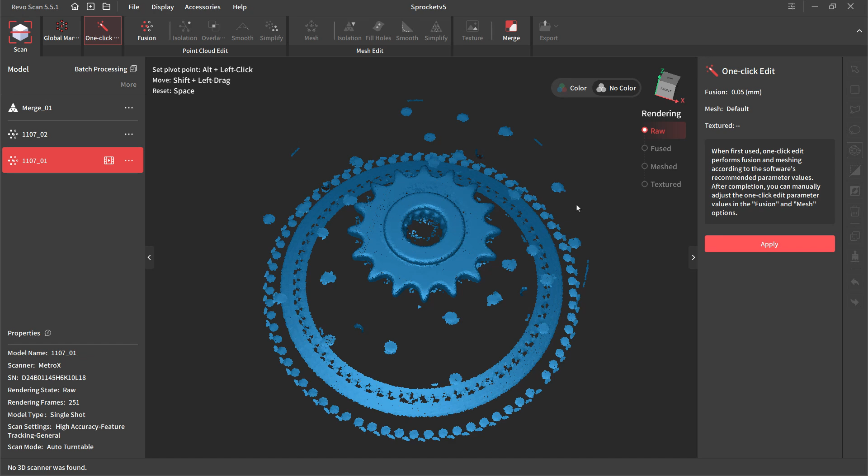So in most of the videos we've done, we've kind of left everything a bit raw, and then we've dealt with it in Fusion or some other CAD program. But I think it's important that we at least understand what some of these tools do and make sure that we can figure out how they apply to our models.

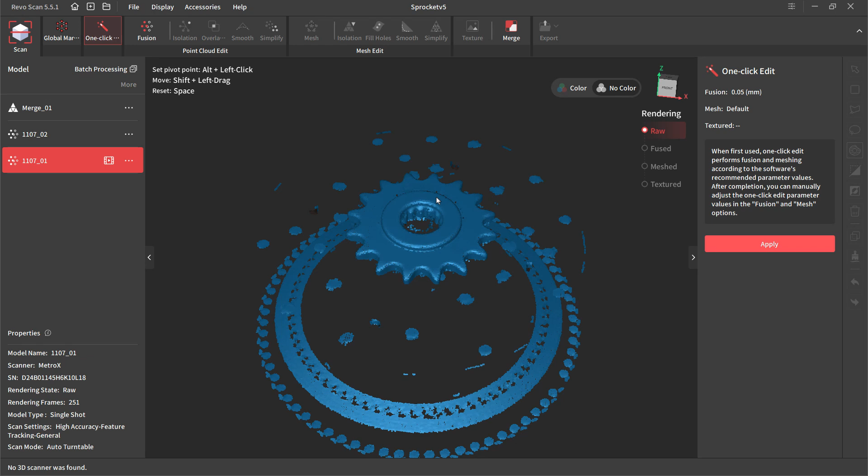So this video, we're looking at a sprocket that was scanned using the MetroX, and it was done on a turntable, which means that it's using single shot mode. So the first thing that we want to identify is that the raw data from single shot mode, whether it's on a turntable or whether it's handheld, will have these little camera icons that are going to show us each view that was captured by the scanner.

Now, whether or not it's single shot mode or if it's laser or if it's just traditional handheld scanning, you have the ability to do keyframe edits, which allows you to go in and delete and remove individual frames from everything that was captured. Now, with this specific one, we captured 251 frames. Now, that's a lot of data for the sprocket, probably more than's needed, but something that you should really keep in mind is that if you start deleting keyframe data, it's permanent.

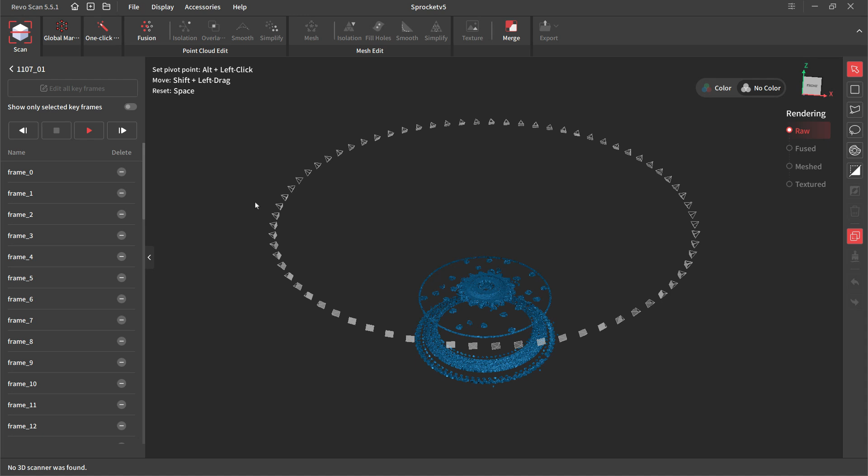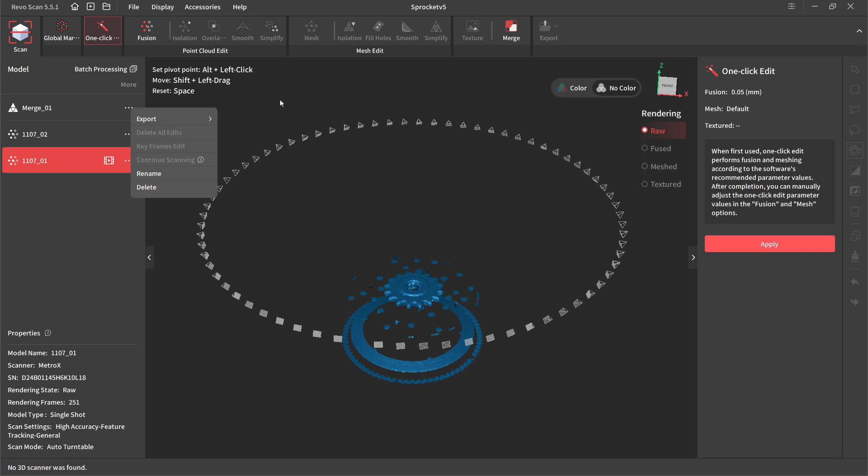Unlike making edits to point clouds or making edits to the mesh, you can't back up and undo removing keyframes. That raw data is going to be removed from your project. I'm not sure if that data is saved anywhere in a cache or in your project outside of the scan, but it's not going to be able to be undone like you can do by going up and undoing those edits that you've had. So keep that in mind. You can remove it, but there is a potential problem of loss of data.

So whenever you go through the process of scanning something, you always have this one-click option, but generally I go through the Fusion process, manually modifying the point clouds and then doing the mesh edits because I like to have control over what each step is doing. So the first step is always going to be fusing the points together.

Now, a recent update of Revo Scan has allowed us to reduce the point distance down to 0.05. That's only available on certain scan types for the MetroX, so the full field and turntable, which uses the full field mode. And if you're using something like the Mini 2, you'll be able to now do this down to 0.05. If you're using one of the laser scan modes, or if you have, let's say, a Pop 3 or some other scanner, then those numbers are going to be reduced from what they have been, but it's not going to go down this low.

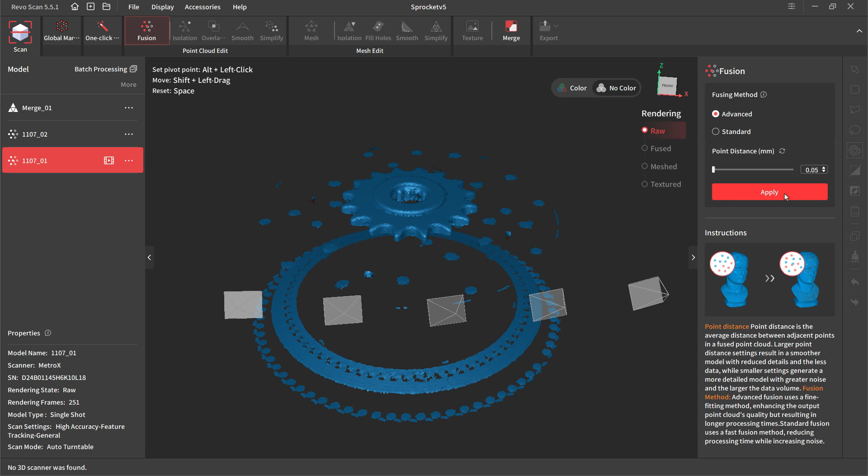So we're going to apply it using the advanced method. The advanced method will give us a more accurate final set of points. The standard will be a little bit quicker, but there may be more noise in the data. And when we talk about noise, really what we mean is vertical variations in the point location. So you can think of it as like an orange peel or a texture that would be on an otherwise smooth, flat surface.

Part of this is going to come from however you prep the part, whether it's scan spray, like in this case, or if it's a shiny part, the actual reflections or the intensity of that shine can have an impact on where those points are. So even though something looks very high polished and very well machined, because of its texture and maybe some settings like the exposure, you may find that you're getting a lot of noise in that data.

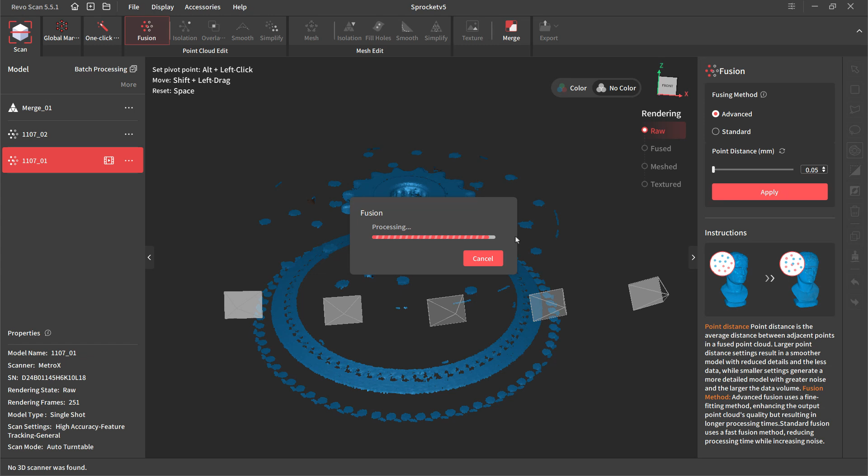So the first step is fusion, which is taking the points and averaging them, putting them all together into this 0.05 millimeter distance. That 0.05 is only available if the points captured are closer or that size. So if you do, let's say, a scan and you set the point distance to 0.3 millimeters, you're not really going to be able to see anything down this low on like a laser scan mode. When we're doing the full field mode, we don't have the option to set our point distance. It's going to be just capturing a ton of data. So that's where you're going to see that 0.05 value.

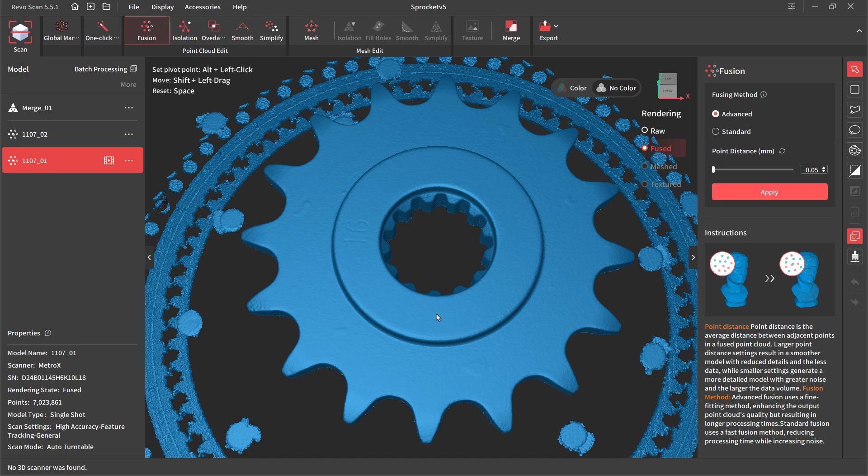So now that we've got our points and we zoom in a little bit, we can see the level of detail that's been captured. The small 16 that's been etched into the surface. Some of these little bumps are actually leftover adhesive from where I removed marker dots. And the texture on this is likely from the scan spray. It's going to have like this orange peel texture that you typically get with spray paint. But scan spray isn't spray paint. It has a carrier like acetone that evaporates and it leaves that powder behind.

So the next thing that we want to do now that we've got all the points fused is we want to get rid of all this extra data that we don't need. So we'll select it, we'll hit delete on the keyboard, or you can select delete over here.

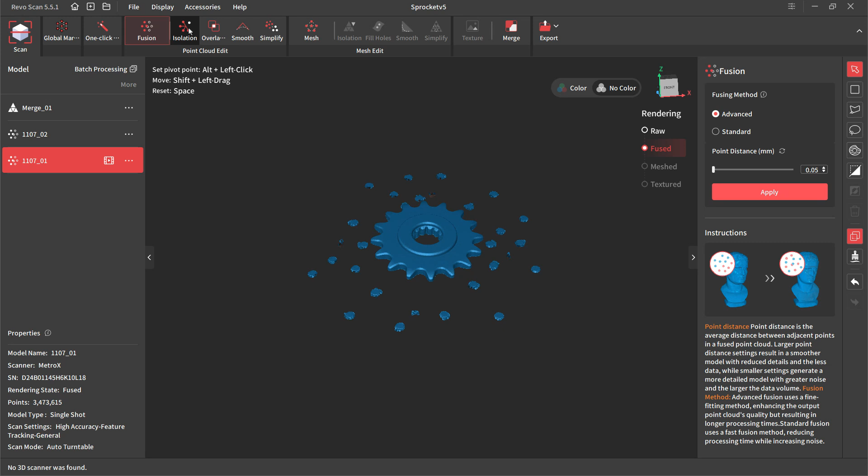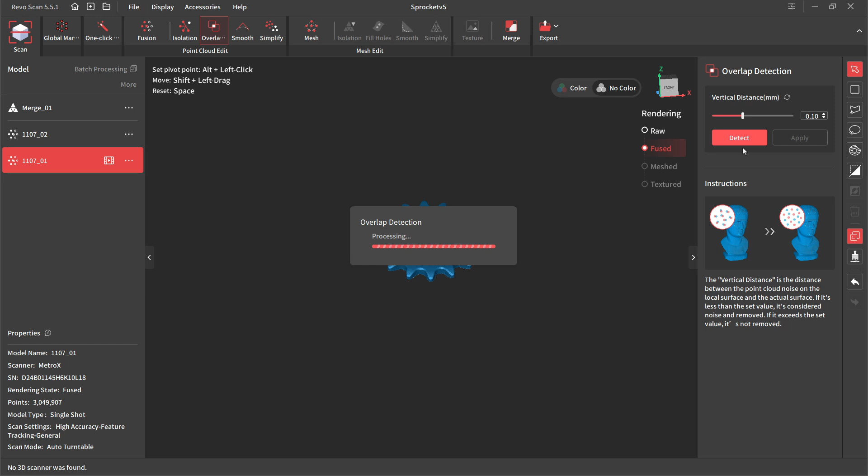And then for all these little points, which are marker dots, we can use isolation. So what this is going to do is it's going to detect basically the grouping of points that are connected, and anything that is smaller than that, that's sort of disconnected, it'll be able to select, and then we can remove it. Overlap detection, this is something that's going to look at points that are above or below, that are basically a little too close together, and we can clean that up as well.

All right, so now at this stage, we've got a little bit over 3 million points. 3 million points is quite a lot. And if we go to a mesh at this stage, we're going to end up with 6 million triangles or somewhere in that neighborhood. And that's going to be way too many. So what we want to start to think about is smoothing and simplifying.

Now, something to keep in mind with smoothing is that at the point level, we've got strength and we've got times, but the number of points that we have is going to have a direct impact on how well this works. So we should think about the strength value as the ability for these points to move, and the times value is the number of times that we actually go through and rerun this process.

So if we have them kicked all the way up, it's going to run through it once. It's going to give it the ability to move the points as far as it can at 20 value, and then it's going to redo that 49 more times. What we're going to see is we're going to get a nice smooth model, but everything is going to be very much like we put this through an oven and melted it. Everything's going to be nice and smooth, but the corners are not going to be quite as tight.

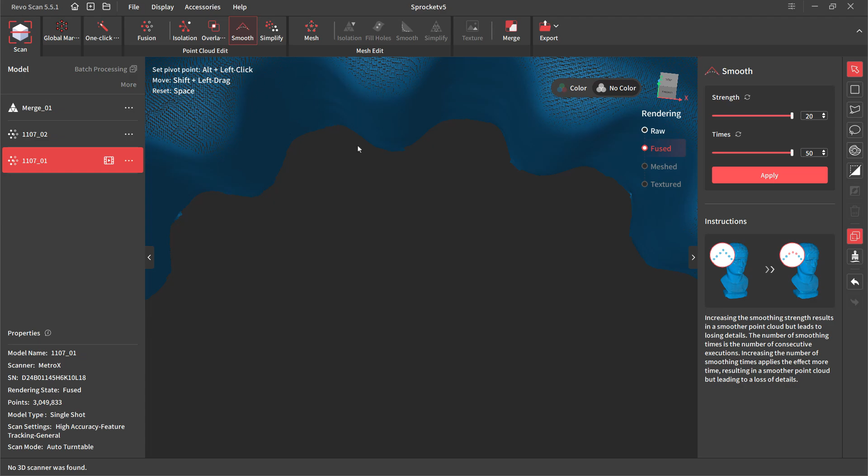So if we consider them as like a fillet, then what you're going to see is they start to get a bit more rounded. You'll notice that the 16 is basically gone, and the ability to move those points up to this 20 value, that was enough to get rid of those points completely. We still have 3 million points, so if we zoom in, we haven't gotten rid of any points. We've just smoothed them out quite a bit.

So if we undo that, and we take this strength slider down to, let's say 10, just halfway, and we reapply that. We're going to still go through the same process, but this time with each iteration, it's not able to move the points as much. So this is going to help us start to preserve some more of these details. So when you're doing this process, you need to think long and hard about what information you need to carry on to the next step. So you can see the 16 here, still sort of visible, but it's pretty much gone.

So if we undo this, we can reduce the number of times we run through this, let's say down to 20, and we can apply it. So each time it's still able to move those points, you know, the strength of 10, but it's only going to run through it 20 times instead of 50. So it's going to start to preserve some of those details.

Probably more than smoothing, you're going to see an impact on simplification. Now, what simplification is doing is it's taking the number of points that we have, and it's going to go through that process of reducing the overall number. So in this case, if we go down to a ratio of 40%, we're going to take our 3 million to like 1.2 million. So not quite half. If we had this at 50%, we'd go down to about 1.5 million.

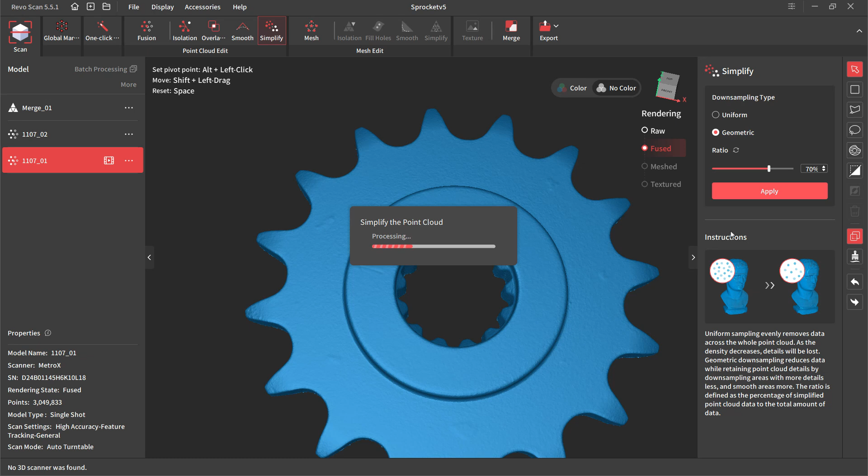I'm going to go to 70%. The reason that this is important is because this on its own can allow us to get a much smoother model. Now, you may need to run it multiple times, and I'm going to run it again. And let's run it one more time. And now what we can see here is we've gone from 3 million points down to 197,000 points.

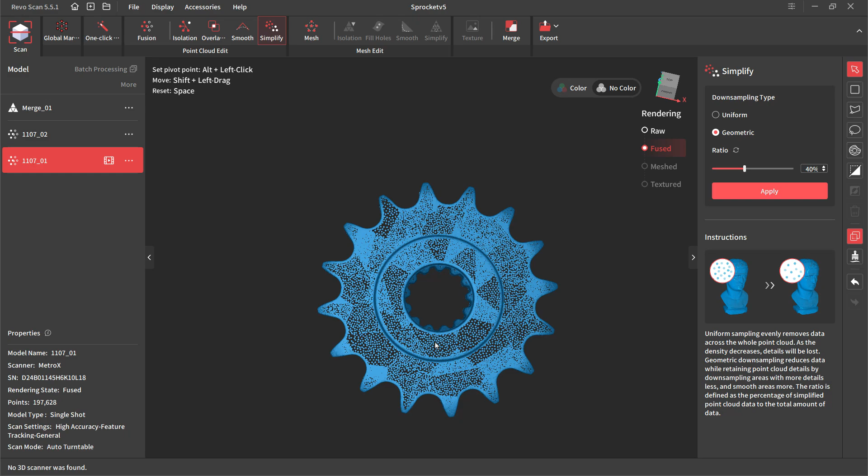But what's important to note is that in the areas of transition, so the fillets in the corner, the actual spline cut in the center, and around the teeth, we've kept the points much denser in those areas. We've preserved that detail. But what you'll notice is that the 16 is gone. So there is a point in the stage where we are going to lose some data. But going through the process with the geometric settings is going to allow us to simplify this model.

Now, the bad thing here is that if we jump in to create a mesh, we're not going to be able to come back and undo this. We have to undo all of our settings. And what I found is that the distance between these points, so let's go into this area here. The distance between these points, this is essentially going to be what our triangle or our distance setting is going to be when we go to a mesh.

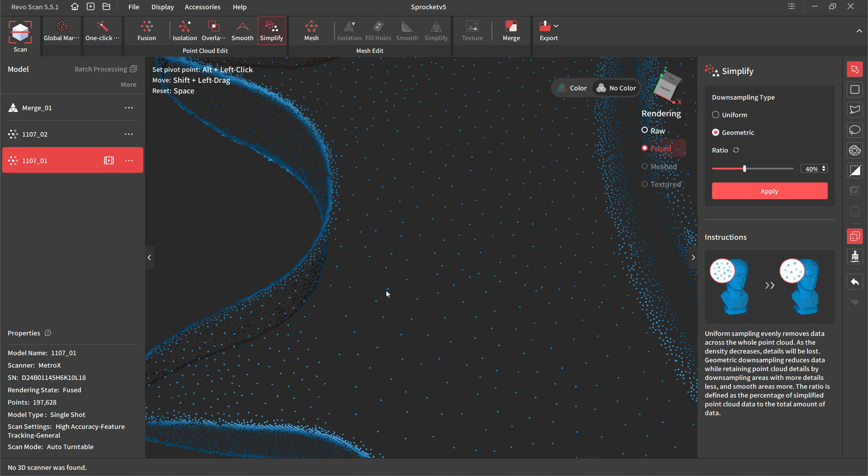So I'm not going to go to a mesh at this stage because for a mechanical part like this, it's not really the right choice. But what you can do is you can play around with that on parts like car fenders, and it can be a good option there. So I'm going to go all the way back to 3 million points, and then I'm going to move into the mesh stage. Now with the mesh stage, there is a quality slider that's going to be extremely important.

Now with the quality slider, generally what we do is we think about just keeping this all the way up, giving us the best final model. But what that actually means is that all of the noise that has come from the raw point data is going to be captured in those mesh elements.

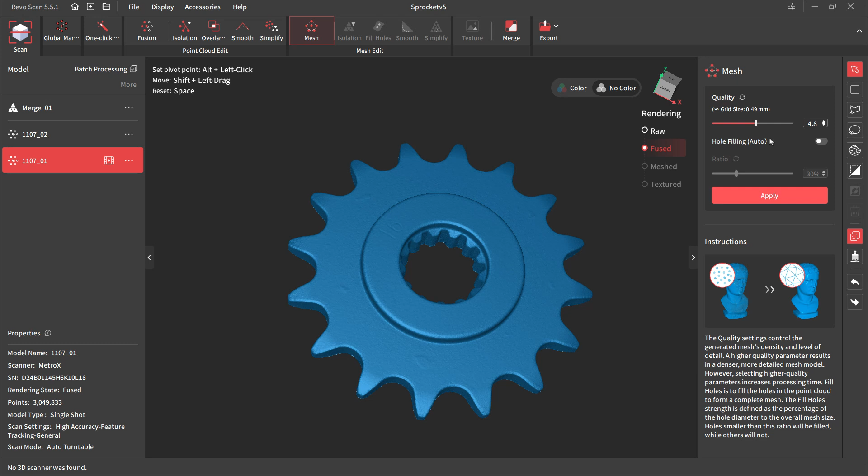So if we want to really start to think about how much detail is needed, it's a good idea for us to start the mesh process with the quality somewhere in the middle, to apply this and create a mesh. And then once we've created the mesh, if we don't like those results, we can move the quality slider up and we can redo the mesh again.

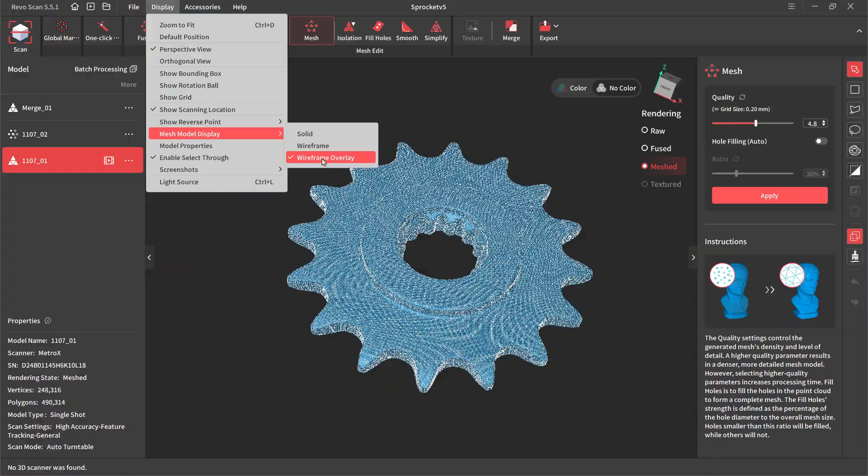So now that we have a mesh, there is a display setting here to show the wireframe overlay. That's off by default, but it's a good idea to turn this on if you're playing around with this. And what we really want to do is we want to take a look at this mesh. We want to see the mesh element sizes and figure out whether or not we captured all the detail that's important. We can go back to this and turn it to solid.

We see that we've got the 16 there. You can see a bunch of lines here, and that's basically the way that the grid ended up working out when it was generating these triangles. But overall, I would say that this captured our design intent. Our number of polygons is 500,000, give or take. So we went from 3 million points, and using the grid size of 0.2 millimeters or 0.5 millimeters is really what we set it at, but it came back with a 0.2 millimeter grid size on the final one, allowed us to reduce the overall file size.

So once again, if you're not happy with the results, what you can do is you can increase or decrease this number and regenerate a mesh file, because it's going to go back to the fused points that we have, and it's going to undo the mesh we created, and it's going to sort of work its way back. I'm going to leave it at this because I think this is a pretty good result, but I want to talk a little bit about some tools.

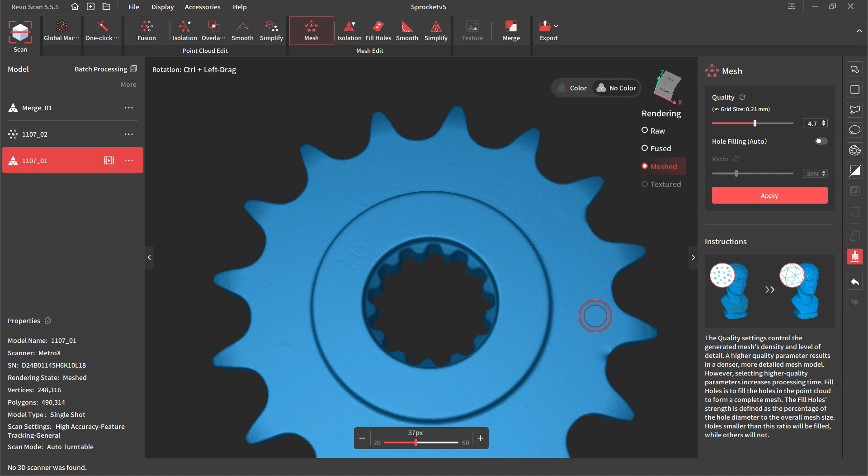We've got this smoothing brush. The smoothing brush works on points as well, but keep in mind that when we're talking about 3 million points, you're not going to see a big difference in what's happening. When we're talking about 500,000 polygons, what we can do is we can use this and we can kind of move it around, and it's going to take a sample size of the points, or the triangles in this case, around what we're selecting, and it's going to allow us to basically reduce those.

Now, you'll notice that if I moved over the edge here, I actually destroyed the edge. So we want to undo and work our way back until that edge comes back. We don't want to get too aggressive with this over corners. You can also use Control-Z on the keyboard.

And keep in mind that everywhere that you touch with this, every time you left click, or if you hold down the left mouse button and drag, it's going to be creating a bunch of different instances of the smoothing, which means that you're going to have to undo quite a bit. You'll notice I messed up that corner a little bit, but I'm just going to leave it for what we're doing here. So this is good to take care of some of those little inconsistencies.

Maybe you've got some marker dots that were left behind, and now we're ready to actually run through and smooth and simplify this model. So I'm not going to worry about isolation or filling holes. I'm going to go straight to smooth. And just like with the points, we've got strength and we've got times. If we leave the strength value at 1, this is giving it the biggest ability to move these triangles. You'll notice that the 16 is now gone.

Now, if I undo that, and instead I take the strength down, but let it run through still 20 times, we are going to get a smoother model. You'll notice that that 16 is still starting to disappear, but overall, the quality of the mesh is still pretty high. Because of the meshing value that we used, that gave us basically 500,000 polygons. You'll notice that these corners look a bit jagged, and that's just simply because of the number of polygons that we have. Again, at any point in time, we can go back and remesh and play around with higher numbers if we want.

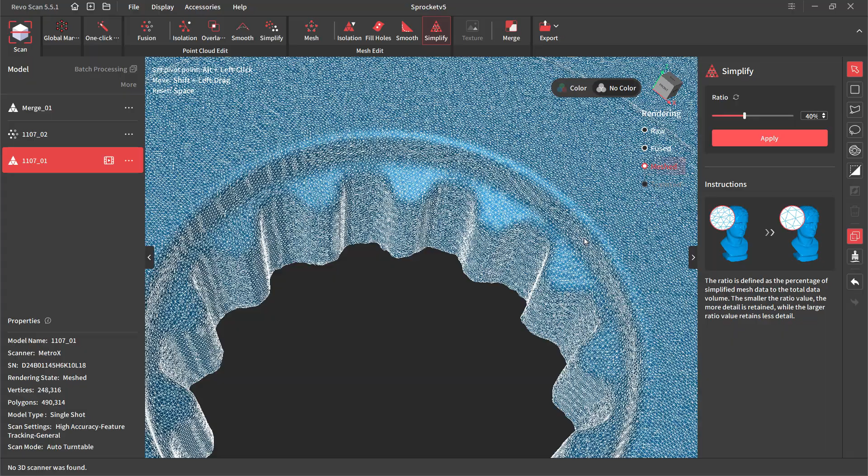If we go to simplify, and I want to show the wireframe overlay here, what this is going to allow us to do is reduce the overall number of triangles. Again, taking it down to 40% ratio, we're going to go from about 500,000 to about 300,000. And in these big areas, you're going to see larger triangles. And in the corners, we're going to still see those tighter, denser packed triangles.

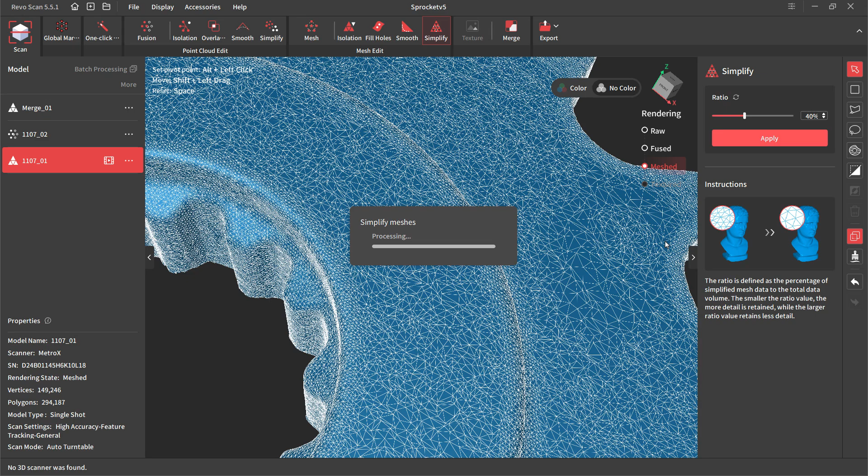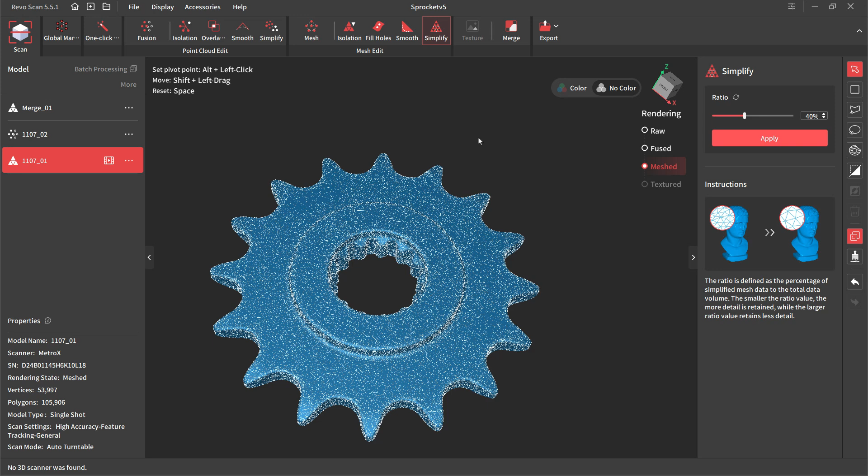So we can apply this a couple times, just like with smoothing. And eventually we're going to get a model that has these large, broad areas simplified, and then we've got these areas of tighter transitions with still smaller, denser triangles. And we've gone from, at this point, 500,000 polygons to 100,000. And again, taking that from the original 3 million raw points down to a mesh model that looks pretty good. It's nice and smooth. It still has all the details that we need, but it's down to 100,000 polygons.

Makes a big difference if you're going to be reverse engineering and working with this file. And let's say you're working in Autodesk Fusion and you really don't want to bring in a file that has 6 million polygons when you can have one that has 100,000 and still have just enough detail for you to reverse engineer the model or to build something off of it.

So I think it is really important that we understand these tools and what they do to our mesh, keeping in mind that anytime we manipulate the point clouds or the mesh, we are changing that raw data. But we do have to remember that the raw data doesn't necessarily mean that it's 100% true. We're going to have some inherent noise in the scan, whether it's the surface texture or surface finish or material, the lighting conditions, or our hand moving over the part and introducing some human error. So those are things that we need to make judgment calls on when we're actually processing this data in Revo Scan.

But at this point, if you're happy with these results, then you can go to export and you can export the mesh model as an OBJ or an STL. Or at any point in time, you could say, well, I didn't really capture enough detail. So I'm going to go back and I want to take this down to 0.1 millimeters, apply it. It's going to overwrite all of the mesh editing that we did.

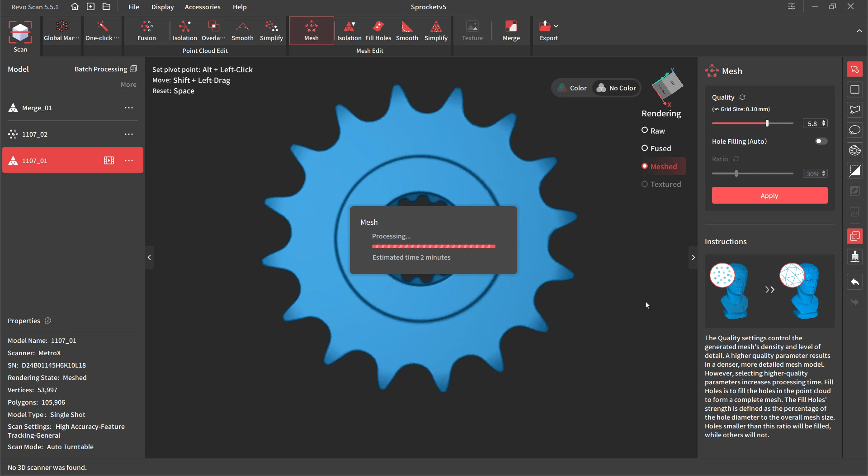It's going to jump back to that fused point cloud that we processed if we did any smoothing or simplification. And then it's going to build another mesh model where maybe we've got higher density in the corners. So as we go through the smoothing and simplification process, maybe we're going to keep more of the raw details and raw data.

So the last one that we had was 500,000 polygons. Now we've got 2 million polygons. We can still use the same tools. So we can kind of zoom in here and we can simplify. We can smooth some of this stuff out. Kind of do this manually. I click a couple times, we'll click there, and then we can run through the process of doing smoothing. I'll maybe kick the strength up a little bit.

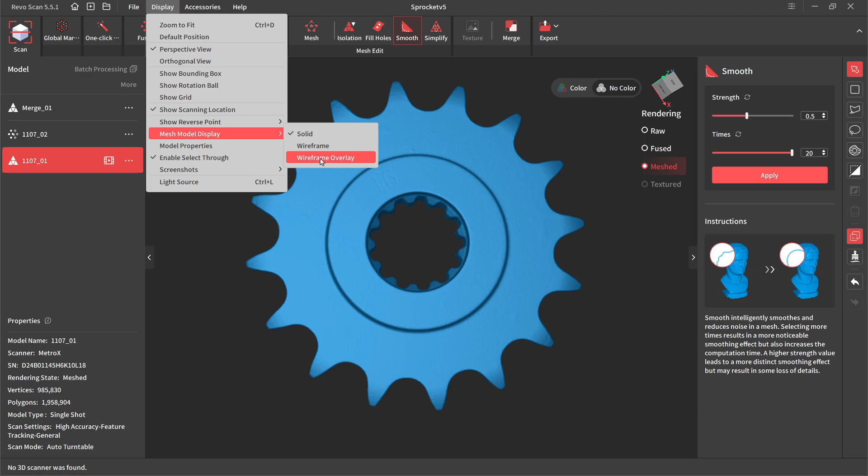Now, because we've got more polygons, we've gone from 500,000 to 2 million. This means that the strength is not going to have as much of an influence, because if we do our display and we do our wireframe overlay, we have got so many more triangles here that moving each of these triangles up or down a little bit is going to have a very minimal effect on the overall mesh. So if I go back and turn my display off, the 16 is still disappearing, but again, overall, we still kind of have a little bit of a bumpy surface from orange peel.

So back to simplify, 40% simplification. In this case, it's not going to go from 500,000 to 100,000. It's going to go from 2 million to, I don't know, maybe 1.2 million or something like that. But each time we do this process, what we're doing is we're manipulating either the points or we're manipulating the mesh data. And you just have to understand, each time I click that button, what does that mean for my data? And is this final result going to be high enough accuracy?

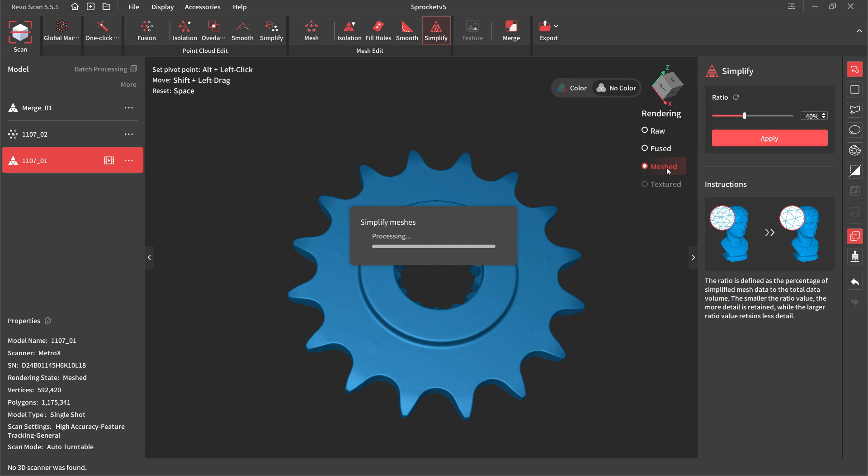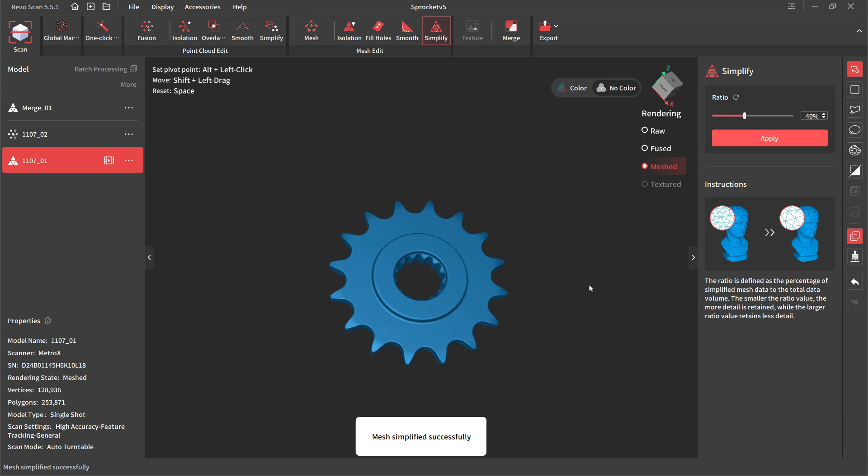What I can already tell you from looking at this one on the screen, as we go through the simplification process, we'll be able to get down to a small polygon number, probably get close to that 100,000 polygons like we had the last time, but our corner detail is going to be much better. We can already see that the corners are sharper, that 16 is still there. There are still some surface inconsistencies to deal with, but I would say that this model at 253,000 polygons is a better model than it was the first time because the quality of the meshing slider was higher and it captured more detail in those edges.

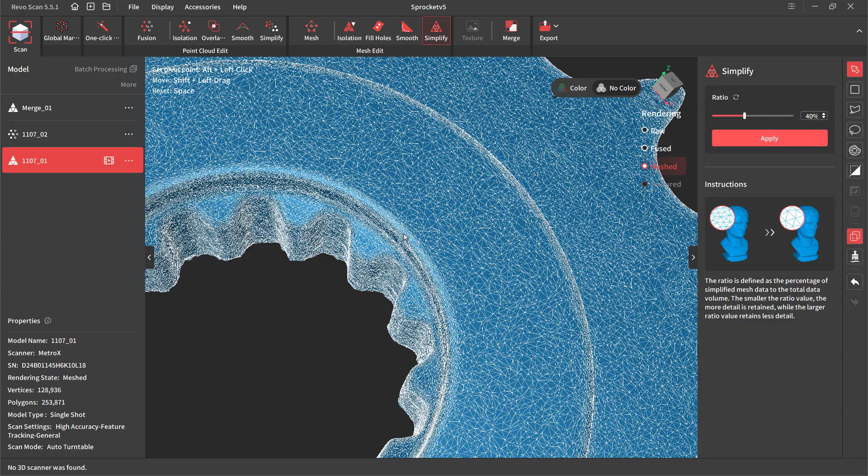So if we go back and we change our display to show the wireframe, you can see that we've got these larger areas, we've got bigger triangles, and then these smaller areas, we've got a tighter density, so it's giving us that edge detail that we might be looking for. So again, the good thing here is that you can always go back and delete all the edits and start over again, or you can go back to meshing and you can remesh this at a higher or lower quality and play around with those settings, making sure that at least you understand what it's doing to your model.

Now, at the end of the day, all of the edits that we're making at the mesh level are likely going to have less of an impact to the accuracy of the model than the edits that we make at the point level. In general, unless I've got a good reason, I generally will not smooth or simplify at the point level, and I'll try to reserve that for doing it at the mesh level. Whether it's picking a different quality setting for the mesh or it's picking a smoothing or simplification setting for the mesh. To me, this generally preserves the raw data better than doing something like an aggressive smoothing or simplification.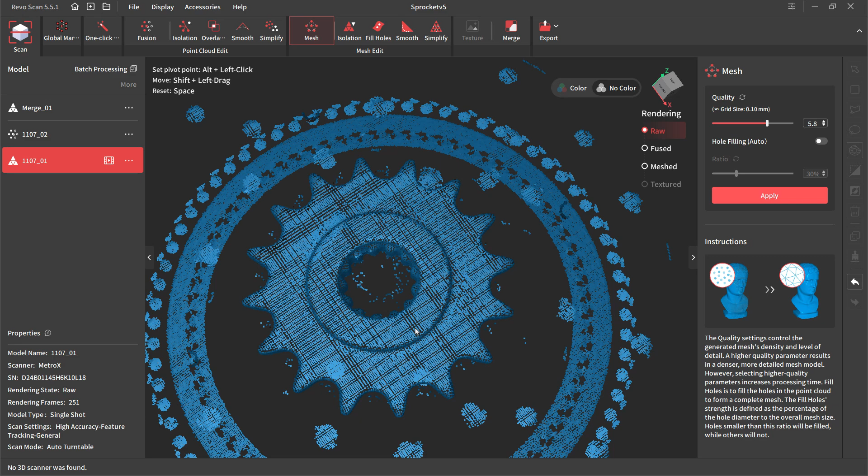Now, if your end goal is not to try to reverse engineer something or not to preserve mechanical details, if you've scanned something like a statue or a figurine, then maybe doing smoothing and simplification at the point level is perfectly fine for you. But for our purposes, I really just wanted to focus on what these smoothing and simplification tools do at both the point and the mesh level, and give you an example of what you can do with the raw data that we got here, moving it into a fused point, leaving it still a little bit rough. We've got 3 million points here, and then moving into this meshed value.

So going back and forth, you can kind of see what the changes are, the corners, and how tight the transitions are, and how things move around a little bit. And again, each of these is going to have some sort of impact on the difference between that raw data and what we're sort of spitting out of the software. So always have to keep that in mind.